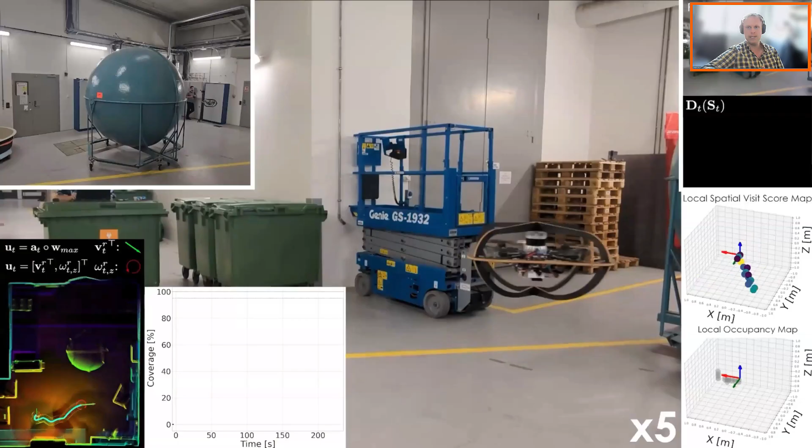And this leads us to actual deployment after training the policy. So the policy is trained purely in the simulator on those primitive shapes. And then we dropped it into real scenarios like here. So first is the inspection of this spherical light chamber, where the robot finds in an unknown space the object to inspect, which is found by this segmented depth image, which is now highlighted. And based on that, and also based on those two other maps, it tries to fill the coverage up to 100% such that the whole surface will be covered.

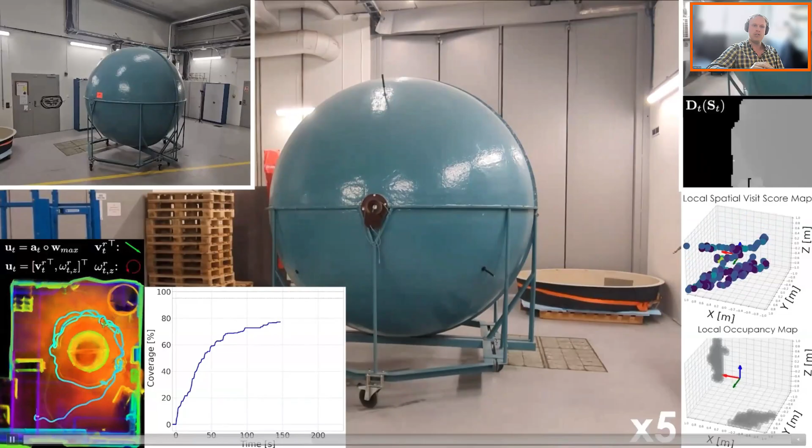What is, again, worth mentioning: everything is processed on board without any information of the environment beforehand. So all the map that you see in the left bottom corner is an online map built alongside the mission. Once the drone finishes the coverage, we exceed the time threshold, and then we proceed to the next mission. And also we show it for more than just one simple object inspection.

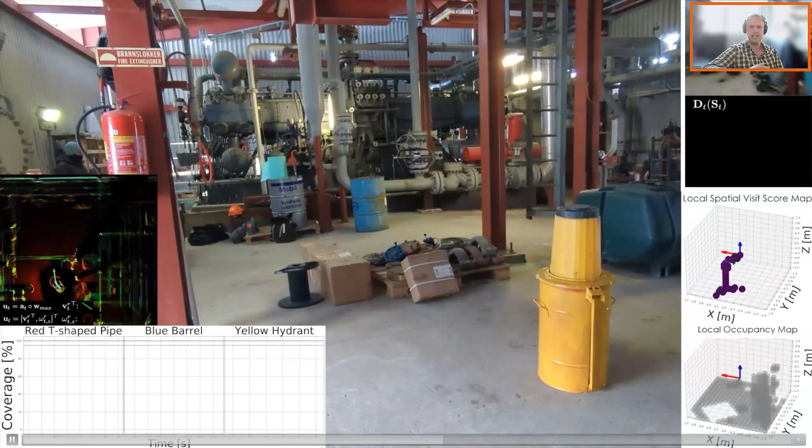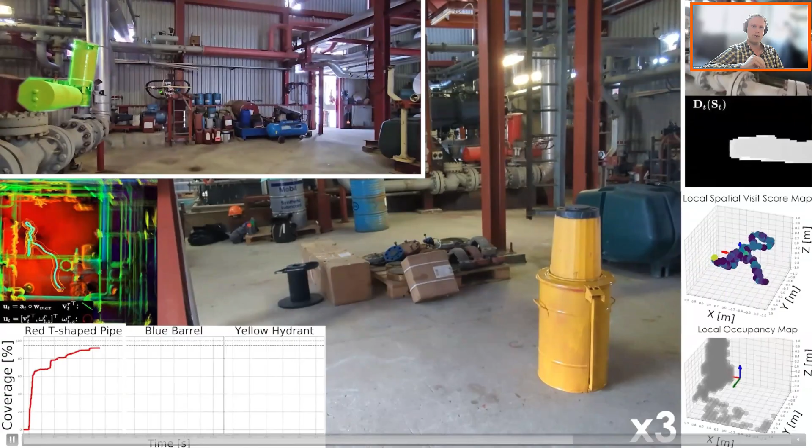Here in more industrial settings, we perform multiple semantic target missions in one go. So we start with the red pipe, which will be highlighted in a second, and then the robot will continue to the blue barrel and finish with the yellow hydrant. What is again worth mentioning here: no prior knowledge about this environment. The robot detects, based on the segmentation mask, the objects which need to be inspected. After exceeding a time threshold, it switches the mask to the next objects and looks for them in the environment, finds them, inspects. Once the time threshold is exceeded, it changes to the next object in a row.

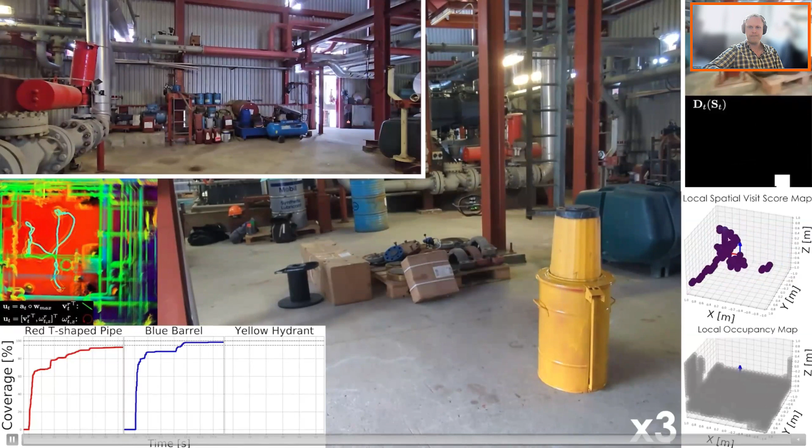And we depict also those surface coverage plots in the bottom left corner. We obtain them in post-processing after the mission. So after completing the mission, we build the meshes of the objects, and then we are able to run those coverage metrics here. And with this, we show that with unseen real semantics, we can get on average around 96% of the coverage.

And a full multi-object mission that I just presented to you, pipe, then barrel, and the hydrant, takes about 157 seconds end to end, which makes it way more efficient than the standard classical approaches, which involve the robot first exploring the unknown environment, mapping the objects, and then performing the inspection. Here we just skip the mapping part. We jump directly to the inspection, allowing us to reduce the mission time significantly. And quite importantly, this involves zero environment-specific tuning, which means we can deploy the policy in any environment without any kind of parameter tuning, which is not the case for classical methods.

Also, we compare our proposed method with the SOTA baseline, so classical approaches, in simulation studies, getting around 95% coverage with far less inspection time. That's what I already mentioned. So with no per-environment fine-tuning and also way less inspection time. So with this purely learning-based inspection method, we are able to reduce the mission time quite significantly.

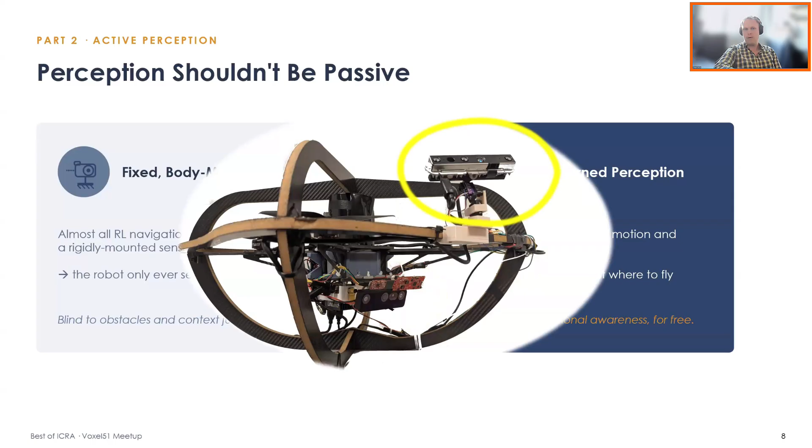And then it's not just about deciding where to fly, but also where to look. So the payoff is quite obvious: safer flight and richer situational awareness, essentially for free, when we switch from this static camera to the active camera, or actuated camera to be precise. So then how it works, how we train it.

Also end-to-end in the simulation, we provide the robot with these observations, which are quite similar to what we saw in the inspection case. So the robot state, but now we don't have the position of the robot with respect to the world, but we have the position with respect to the goal, denoted here by G. But then we also extend it with the camera orientation. So the robot should also have feedback on where the camera is currently pointing.

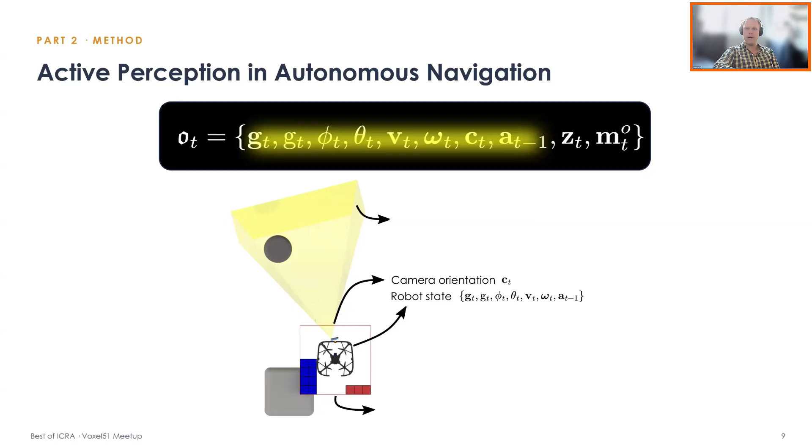Then we have similarly the depth image and the local occupancy grid, how it is built along the window of depth images. We can create those local occupancy grid maps, which will inform the robot if there is some occupied region that the robot might collide against, such that it also ensures safe flight during the mission or during the navigation.

So how does the policy work? We trained end-to-end in simulation, and then the policy outputs a six-dimensional action vector, which is composed of linear velocity, so 3D XYZ velocities, and the yaw rate, which define the navigation action terms. And then we also add now the pitch and yaw set points for the actuated camera, to where the agent should point the camera. So both actions are commanded by a single network, trained, as mentioned, end-to-end.

So the perception control or camera control never comes at the expense of safety or goal-reaching behavior, which is quite important. So the interesting part is not really the network per se, but how we train it to achieve this motion. So the reward which guides this behavior consists of four terms, namely goal progress, which rewards the agent to get towards the goal, here depicted in the green dot. Smoothness, which penalizes the jerky motion of the camera as well as of the agent.

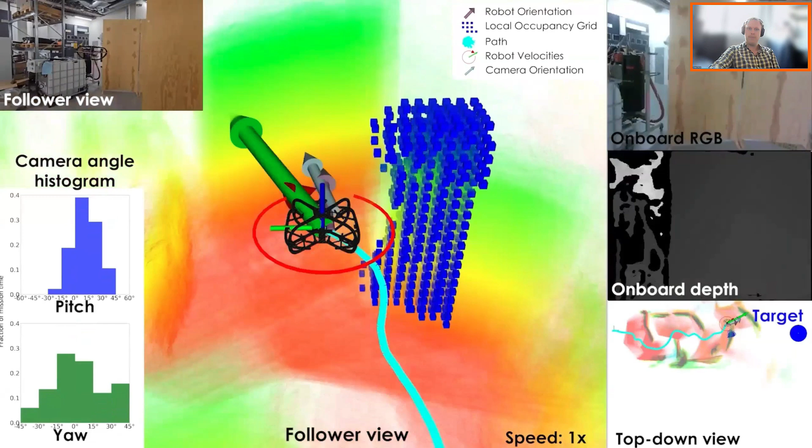So just to show you how it flies in the real world, we deployed it in a highly cluttered corridor environment where some of the gaps are almost as small as two times the robot size. So there's really not so much space to navigate in. And here we present the camera orientation, not really dependent on the robot motion. So on the left, we depict the camera angle histograms, pitch and yaw, which vary along the mission, increasing the awareness of the robot such that it doesn't collide with objects, although they are not currently in the field of view, because the robot was able to see them before.

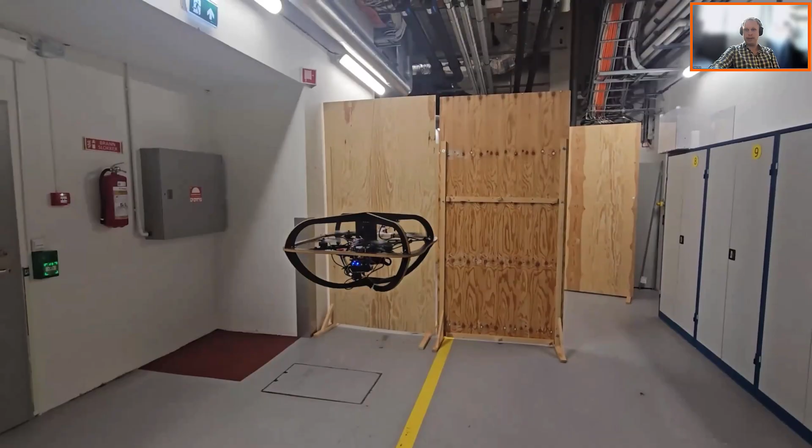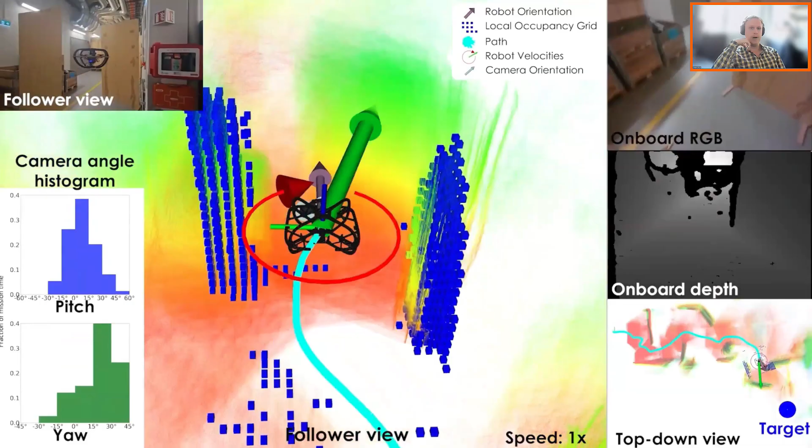Next, it's another example in the T-shaped corridor where the camera moves around to increase again this situational awareness, to find the gaps in the environment where the robot can pass through, while again trying to reach the target. So the moving of the camera doesn't compromise the navigation success or performance in general, which is not the case for the static camera policies, which will be shown in a second, where the robot truly has a forward-facing camera, and then the navigation performance is decreased quite a lot.

So in this setting, since the gap is quite narrow, the static camera policy fails here. So we make the environment way less challenging, where the robot then is able to navigate. It ends up in really erratic motions, you can see, compared to the actuated camera policy, and also in the mid-flight collision, as indicated right now.

So we show with it that active perception allows us safe flight as well as better awareness about the robot's surroundings. So that's like the very first takeaway from this work. Second is, as mentioned, safer flight. With an actuated camera, we can anticipate obstacles way faster and also point the camera to the regions that are right now directly outside of the flight path.

But it might happen that in the future the robot will take this path, and therefore the agent already anticipated those regions beforehand with the camera. We validate the approach quite extensively within sim as well as in real-world experiments, and compare with static fixed forward-facing cameras, where we show that with active perception, the robot is able to build way richer spatial awareness compared to the

static camera approaches.